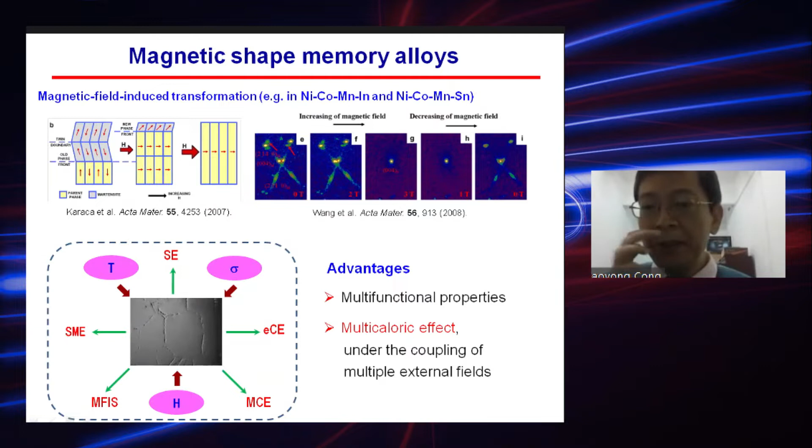However, these kind of alloys are very brittle, and the critical field for magnetic field-induced transition is too high, which are two bottlenecks for applications. Another disadvantage of this kind of alloy is that its elastocaloric effect is small, especially when we compare it with nickel titanium.

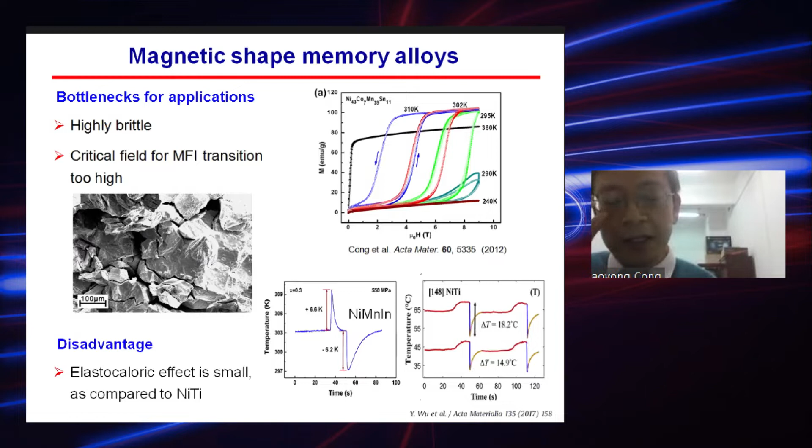Our recent work mainly focuses on 2 points. The first one is overcoming the brittleness issue, for which we use a strategy of forming oligocrystalline structure through microwire preparation. And the second part is high performance design, and we have got elastocaloric effect with adiabatic temperature change as high as 31.5 Kelvin. The first part is more related to metallurgy, and the second part is more related to physics. So now the first part, overcoming the brittleness issue.

We know that nickel manganese-based magnetic shape memory alloys show multifunctional properties, including magnetocaloric effect, elastocaloric effect, and barocaloric effect. And it can realize multi-caloric cooling under the coupling of multiple external fields. But the polycrystals are very brittle, the grain boundaries are very weak, and they are prone to intergranular fracture during loading. Therefore, the cyclic stability of the elastocaloric effect is very poor, which hinders its practical applications.

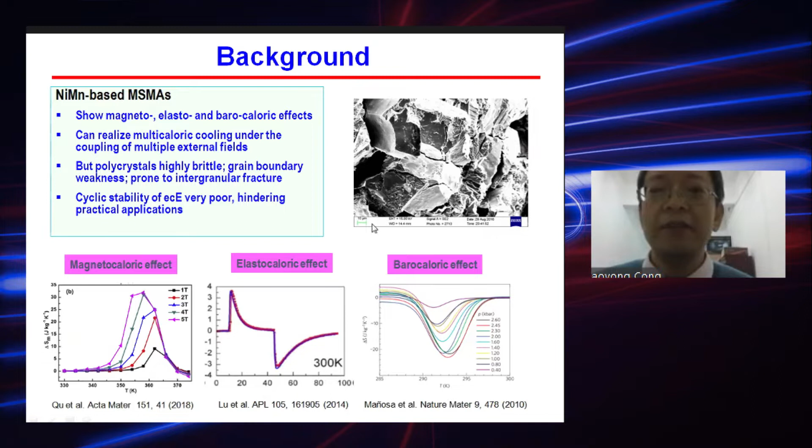Our strategy is to create this kind of oligocrystalline structure through microwire preparation. With this kind of structure, we can increase the surface area and form a bamboo-like structure. We know that in polycrystals of magnetic shape memory alloys, during the phase transformation, there is strain incompatibility at triple junctions or along the grain boundaries. So it is very easy to form stress concentrations at the triple junctions and the grain boundaries, and thus during loading, cracks can easily occur along the grain boundaries or at triple junctions, leading to a brittle intergranular fracture.

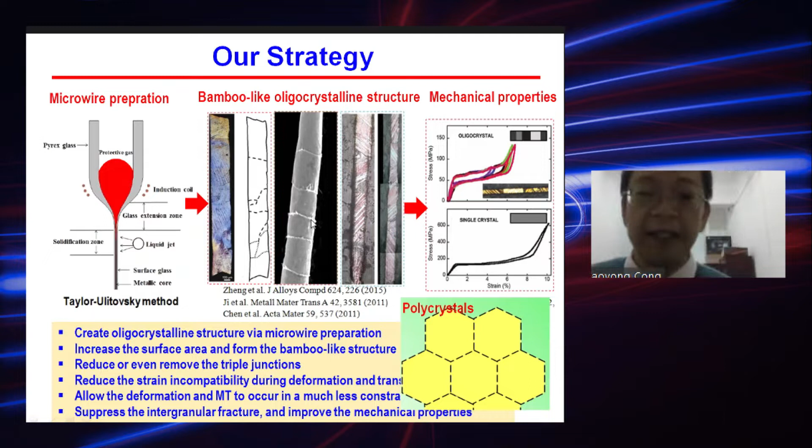But with this kind of oligocrystalline structure, because the surface area is large, there are only a few grains in the sample, and it has bamboo-like grains. Therefore, we can reduce the strain incompatibility at grain boundaries during both deformation and stress-induced phase transformation. This allows the transformation and deformation to occur in a much less constrained environment. And therefore, the intergranular fracture can be suppressed, and the mechanical properties can be improved.

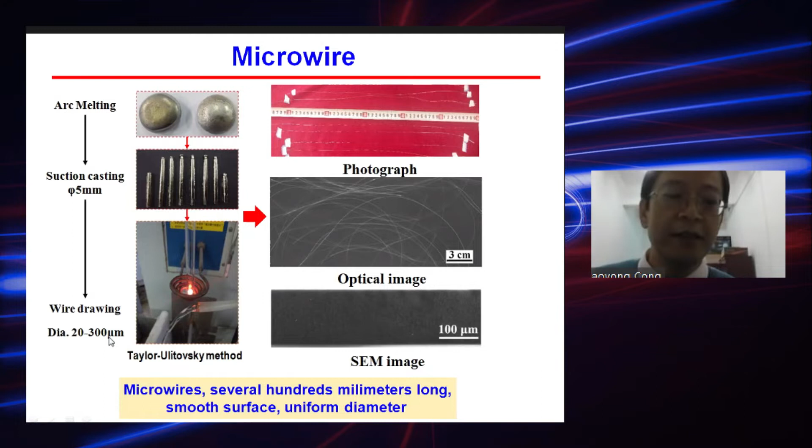So we first use arc melting to prepare the button ingots, and then we use suction casting to get the cylindrical rod. And then we use the Taylor-Ulitovsky method to draw wires, and the wires can have a diameter between 20 and 300 micrometers. And the microwires can be several hundreds of millimeters long, and they have a smooth surface and a uniform diameter.

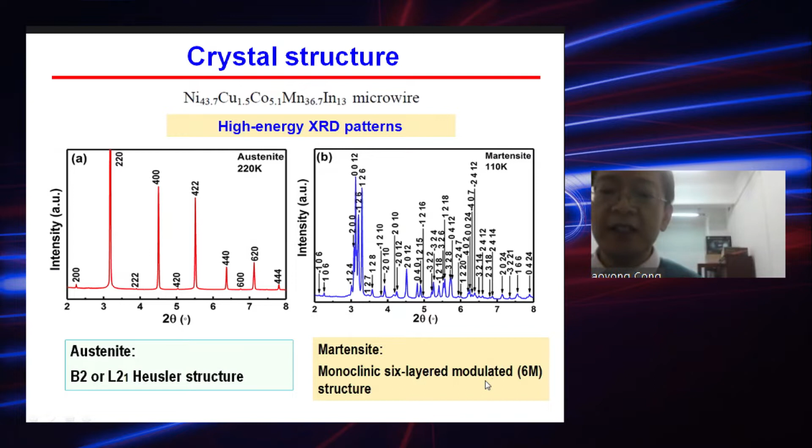First, we studied the crystal structure at both high temperature and low temperature by X-ray diffraction experiment. We find that the austenite has a B2 or L21 structure, and the martensite has a monoclinic 6-layered modulated structure. Then we investigated the mechanical properties and superelasticity. We know that the bulk polycrystals of magnetic shape memory alloys show hardly any tensile deformability. Even for compression, the superelastic strain is usually small, about 1%.

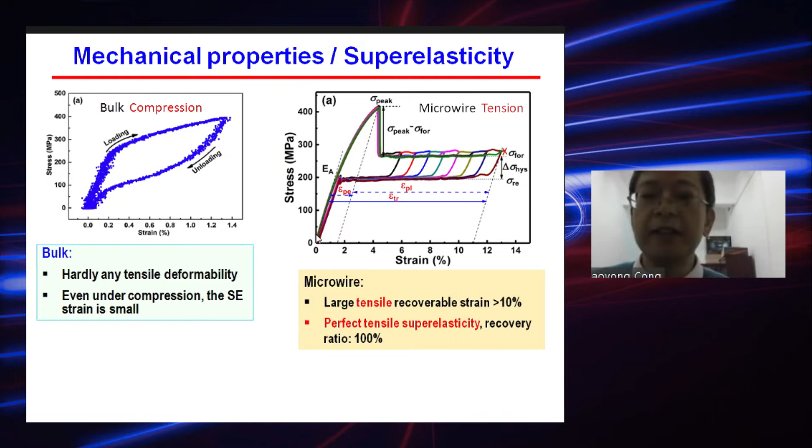But for the microwire, we get very large tensile superelasticity. The recovered strain can be more than 10%. And also, the strain can be fully recovered after unloading, giving rise to a perfect tensile superelasticity.

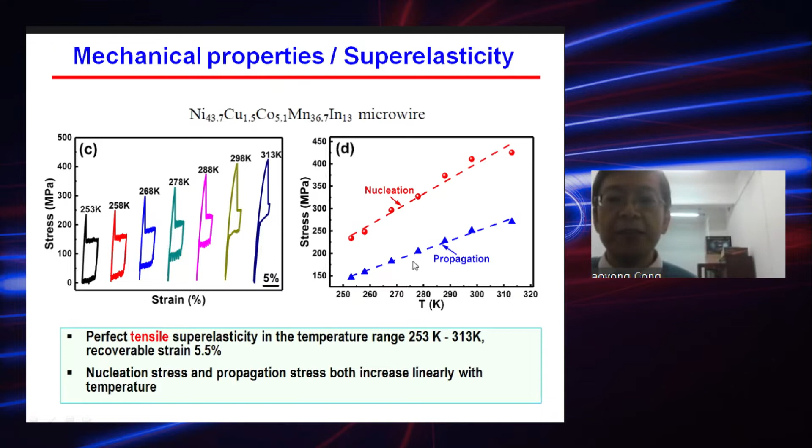And we checked the superelasticity at different temperatures. We find that we can get perfect tensile superelasticity at temperatures from 253 to 313 Kelvin, with a large recovered strain of more than 5%. And also the nucleation stress and the propagation stress increase with the temperature.

Then we want to check whether there's magnetic field-induced transformation in the microwire. We first performed thermomagnetization curves. We find that applying a magnetic field significantly decreases the phase transition temperature. Therefore, it is possible to induce transformation with the magnetic field at constant temperatures around the phase transition. Then we check the magnetization as a function of field. We find that at different temperatures between 166 and 180, we have a strong magnetic field-induced first-order phase transition.

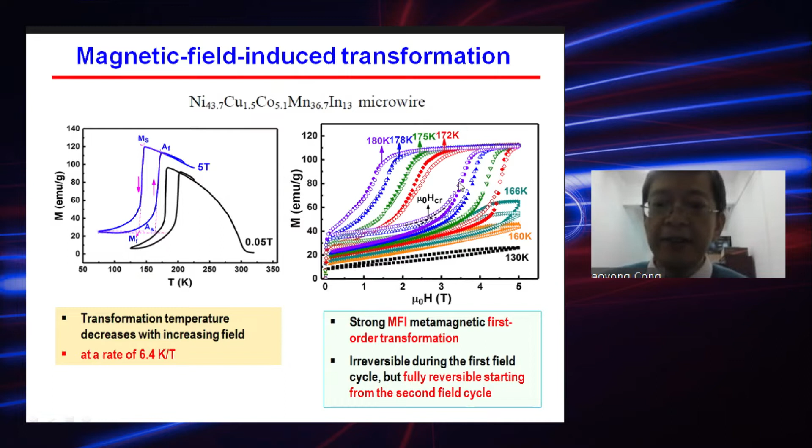Although this transition is somewhat irreversible during the first cycle, starting from the second cycle, it becomes fully reversible. This reversible magnetic field-induced phase transition can give rise to a variety of magneto-responsive properties. For example, magnetocaloric effect, magnetic superelasticity, magnetoresistance, and magnetothermal conductivity.

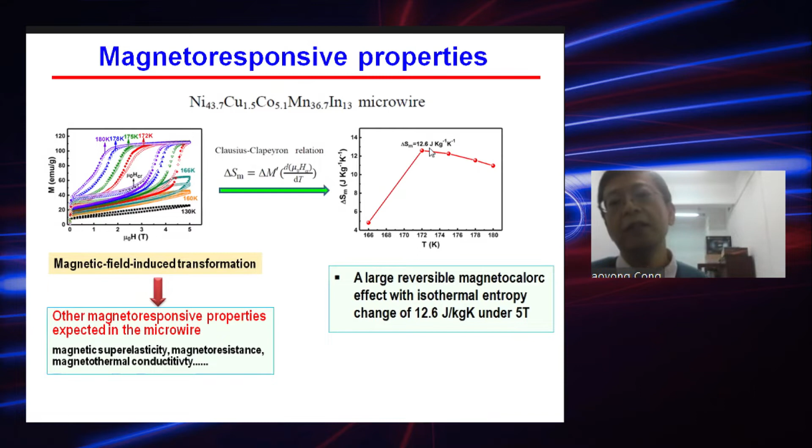We estimated the magnetic entropy change with this equation. We find that under a field of 5 Tesla, we can get a large reversible magnetic field-induced isothermal entropy change of 12.6 J per kilogram per Kelvin.

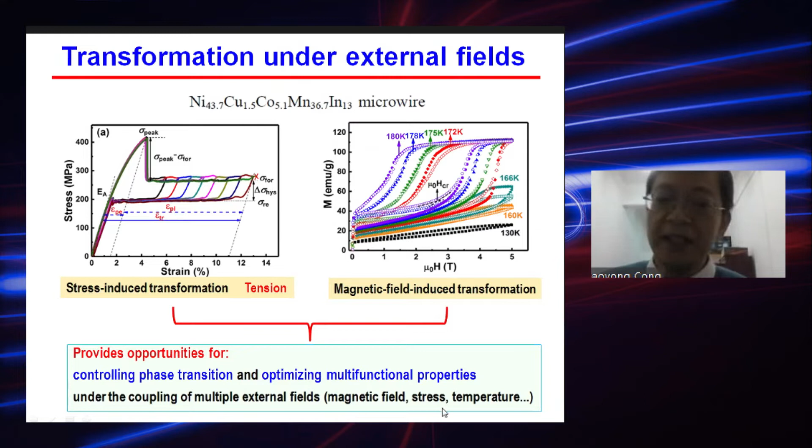Just as we mentioned, we get both stress-induced transformation and magnetic field-induced transformation in the microwire. This provides opportunities for controlling the phase transition and optimizing the multifunctional properties under the coupling of multiple external fields, that is, magnetic field, stress, and temperature.

With this part, I give a summary. We have developed an oligocrystalline microwire with both tensile superelasticity and magnetic field-induced first-order phase transition. This microwire shows perfect tensile superelasticity with a recovered strain more than 10%. This is in sharp contrast with the bulk sample that shows hardly any tensile deformability.

A magnetic field-induced transition from martensite to austenite has been realized in the microwire, which may give rise to a variety of multifunctional properties. With stress-induced transformation and magnetic field-induced transformation in this microwire, we can try to get the multicaloric effect under both stress and magnetic field.

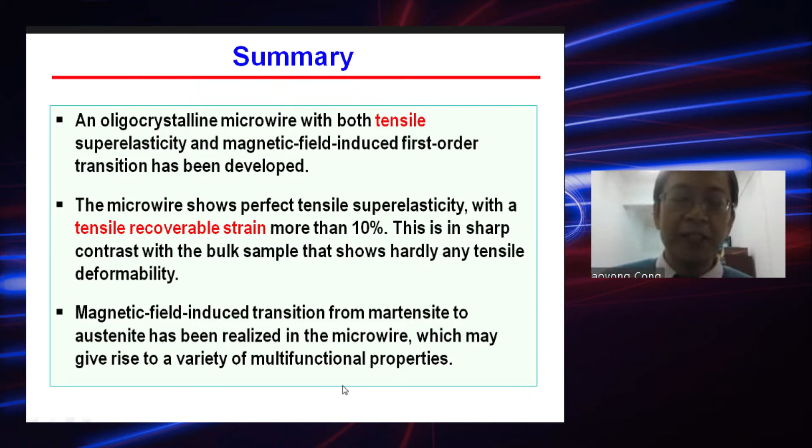The second part is high-performance design for the big elastocaloric effect. This part of the work is done in collaboration with Professor Luis Mañosa and Professor Antoni Planes. Our material design concept for getting a large elastocaloric effect mainly consists of the following 2 points. First, the material should have a large transition entropy change. This will ensure that we have a potential to obtain a large elastocaloric effect.

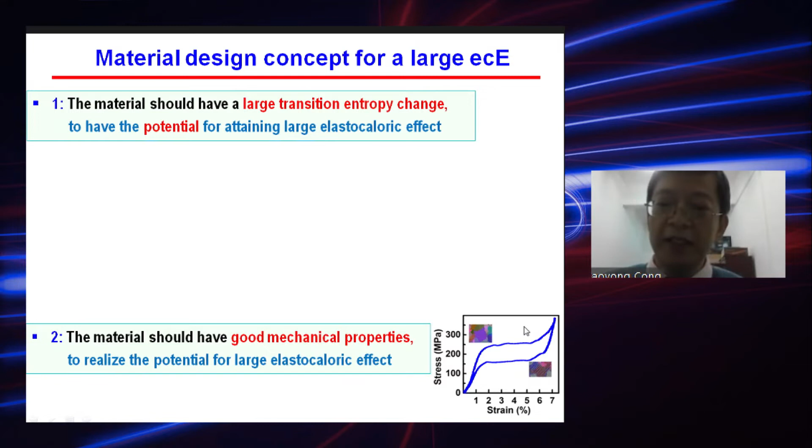Second, the material must have good mechanical properties, so that when we have the stress-induced martensitic transformation, the sample will not break and will not deform plastically, so that the stress-induced transformation can be complete and we can make full use of the large transition entropy change.

Note that for shape memory alloys, transformation entropy change mainly consists of 3 parts: lattice entropy change, magnetic entropy change, and electronic entropy change. Among these, the lattice entropy change plays a dominant role. Especially for martensitic transformation, the larger the unit cell volume change across the phase transition, the stronger the first...

Our material design concept mainly consists of 2 points. First, the material should have a large transition entropy change. This will ensure potential for obtaining a large elastocaloric effect. The second point is the material should have good mechanical properties, so that during the stress-induced transition, the sample will not break and will not deform permanently. This will ensure a complete stress-induced martensitic transformation, which will make full use of the potential to obtain a large elastocaloric effect.

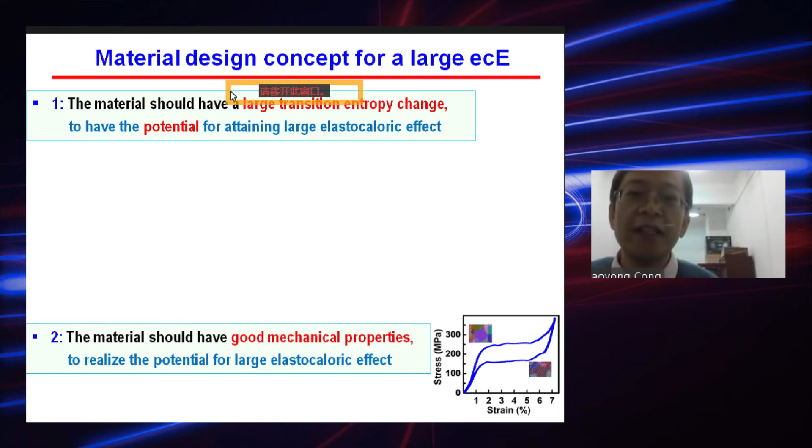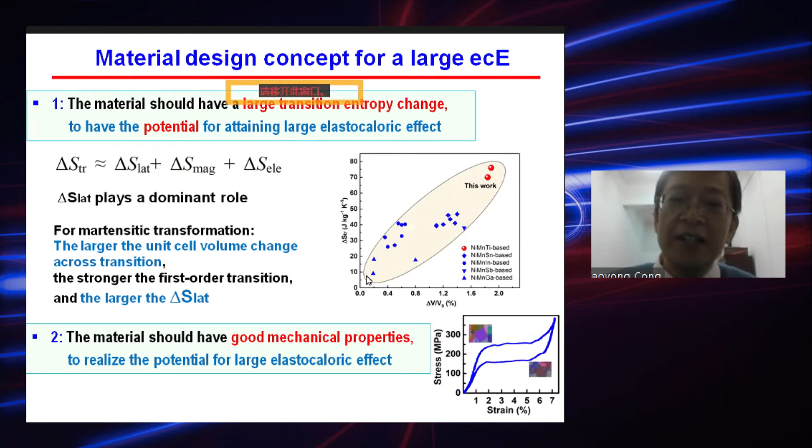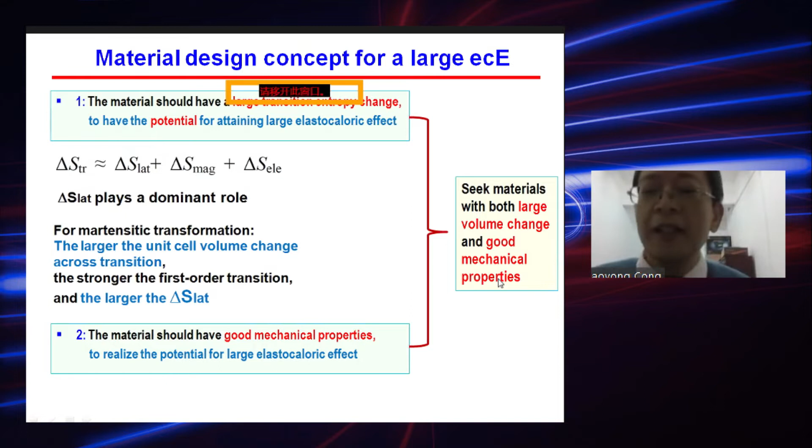As we know, for shape memory alloys, the transformation entropy change consists of 3 parts: lattice entropy change, magnetic entropy change, and electronic entropy change, among which the lattice entropy change plays a dominant role. Especially for martensitic transformation, the larger the unit cell volume change across transition, the stronger the first-order transition, and the larger the lattice entropy change. Therefore, the problem becomes seeking materials with both large volume change and good mechanical properties in order to get a large elastocaloric effect.

Considering that the nickel-manganese alloy has a large unit cell volume change, we mainly focus on the nickel-manganese-based Heusler alloy families, which include nickel-manganese-gallium, nickel-manganese-indium, nickel-manganese-tin, and nickel-manganese-titanium. We first use first-principles calculation to get the elastic constants and moduli.

We focus on the parameters reflecting the intrinsic brittle or ductile properties of metals. They are B over G and C12 minus C44, which is also called Cauchy pressure. We find that among these nickel-manganese-based alloy systems, nickel-manganese-titanium has both the largest B over G and the largest Cauchy pressure. Therefore, it is most probable to have the best mechanical properties in the nickel-manganese-titanium family.

Thus, we prepared a series of nickel-manganese-titanium alloys with titanium substituting manganese. We find that with the increasing amount of titanium, the phase transition temperature decreases. Because we want to get the elastocaloric effect at room temperature, we mainly focus on the alloys with transition temperature slightly below room temperature. As I just mentioned, the nickel-manganese-titanium alloy system has the best intrinsic mechanical properties.

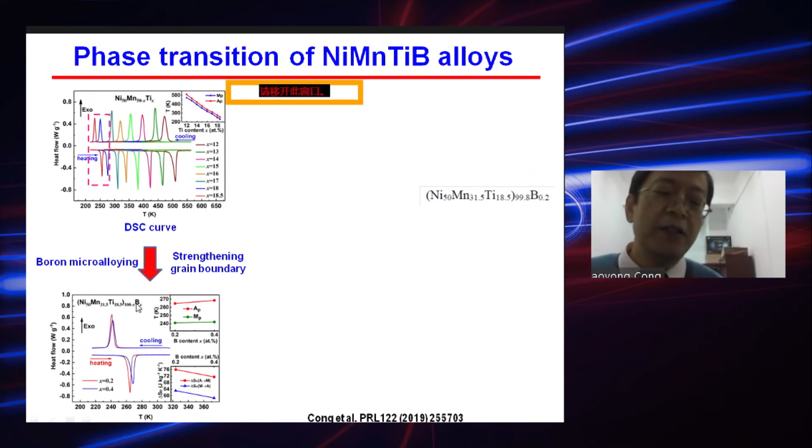But for polycrystals, we know that for this kind of polycrystals, especially for the alloys with large volume change across phase transition, the grain boundaries are very weak. Therefore, we use boron microalloying to strengthen the grain boundaries in this alloy system, so that we can expect good mechanical properties in the polycrystals.

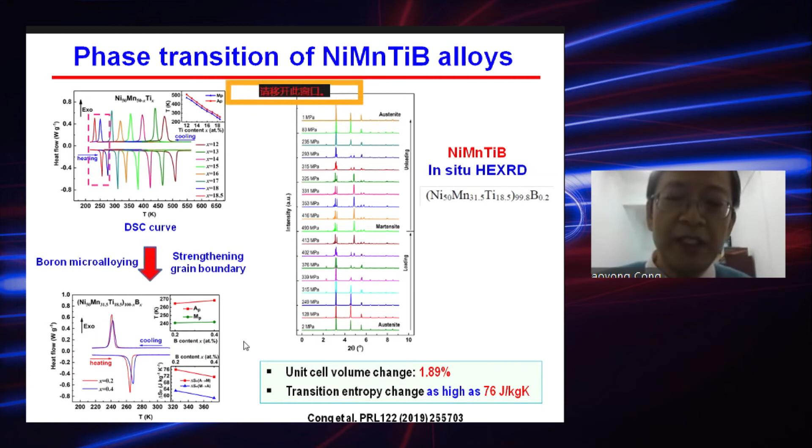We used in situ synchrotron high-energy X-ray diffraction experiments to get the unit cell volume change, which is as large as 1.9%. And we find the transition entropy change is as high as 76. Therefore, we expect that we can get a large elastocaloric effect in this sample.

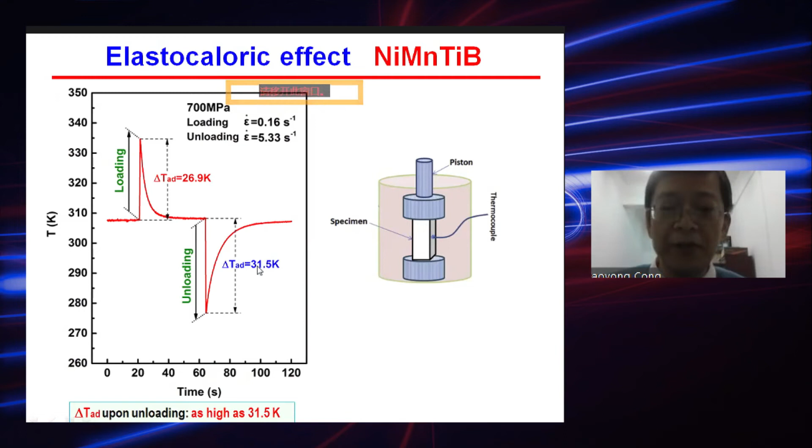When we tested the elastocaloric effect, surprisingly, we find that during unloading, we can get an adiabatic temperature change as high as 31.5 Kelvin. We also estimated the stress-induced isothermal entropy change by integrating the areas on the stress-strain curves measured at different temperatures. We find that the stress-induced isothermal entropy change is up to 45 joules per kilogram per Kelvin.

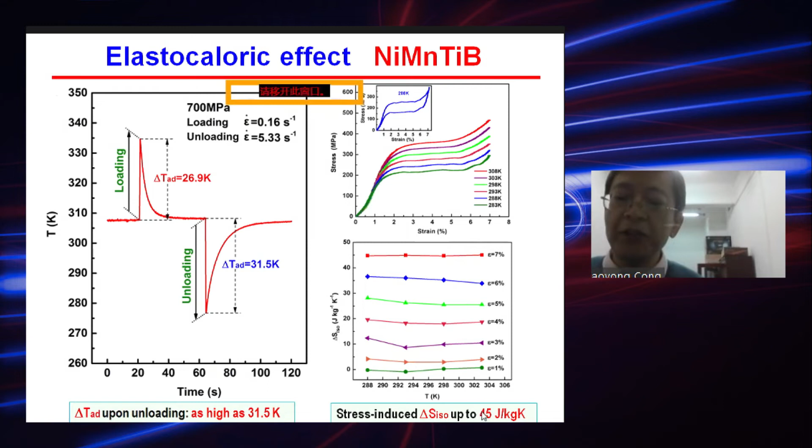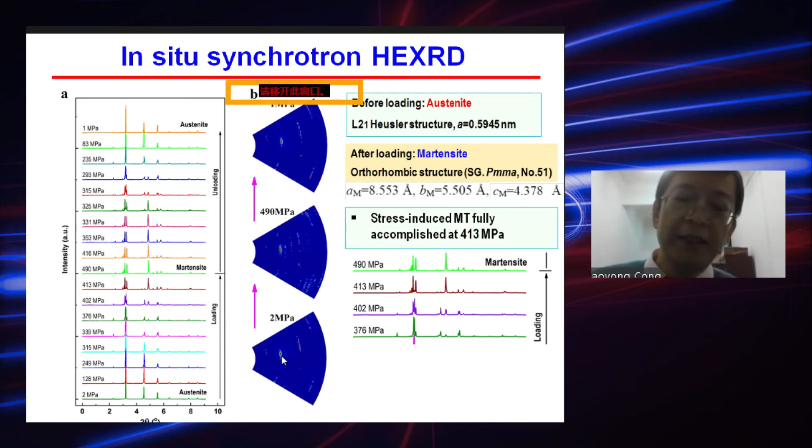We carefully analyze the X-ray diffraction pattern. We find that at 413 megapascal, the stress-induced martensite is complete with no residual austenite. We checked the two-dimensional diffraction patterns before loading, at the maximum stress and after unloading. We find that the diffraction patterns before loading and after unloading are almost identical. This shows that the stress-induced martensitic transformation is fully reversible.

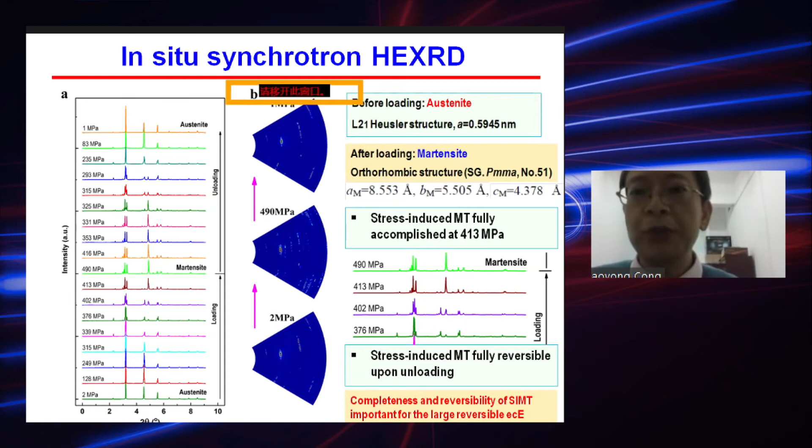The completeness and reversibility of the stress-induced martensitic transformation is very important for the large reversible elastocaloric effect. If the transformation is not complete, we cannot make full use of the latent heat. If the transformation is not reversible, the elastocaloric effect can only be used once, not for repeated times. With the lattice parameters of austenite and martensite, we get a large unit cell volume change of 1.9%. This leads to a large lattice entropy change and thus a large transition entropy change. And finally, we get a large elastocaloric effect.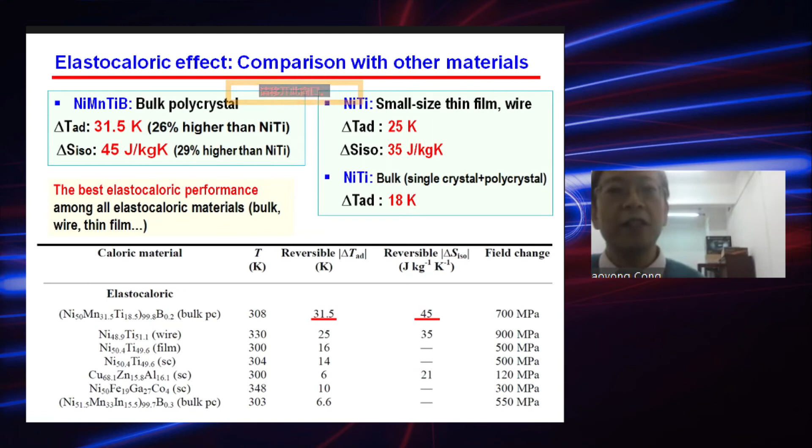We also compared with other materials, and we find that our sample shows the best elastocaloric performance among all elastocaloric materials, no matter whether it is in bulk, wire, thin film forms or in other forms. We also compared the temperature change with other caloric materials, including magnetocaloric, electrocaloric, and barocaloric materials. It should be mentioned that here we only compare the adiabatic temperature change that is directly experimentally measured. We did not consider the values obtained indirectly or quasi-directly. And this is the position of our adiabatic temperature change, and we find that it is the highest adiabatic temperature change among all caloric materials.

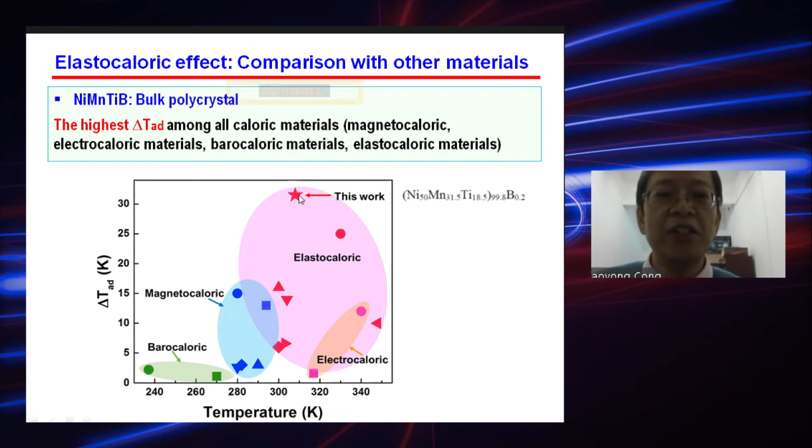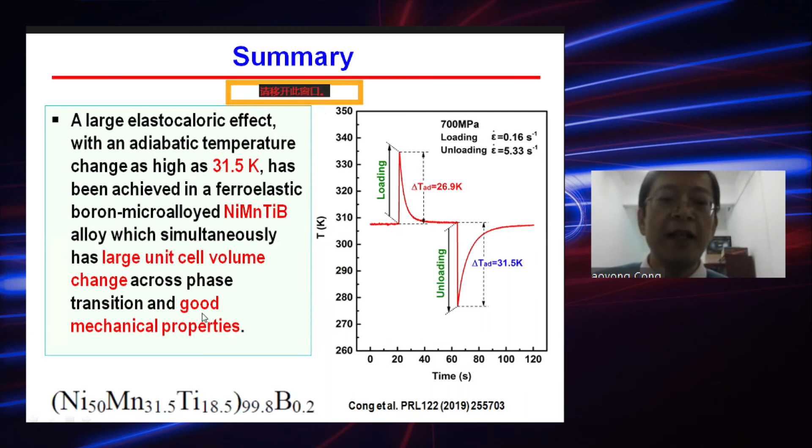This is a summary of this part. We obtained a large elastocaloric effect with an adiabatic temperature change as high as 31.5 Kelvin in nickel manganese titanium alloy, which simultaneously has a large unit cell volume change across phase transition and good mechanical properties.

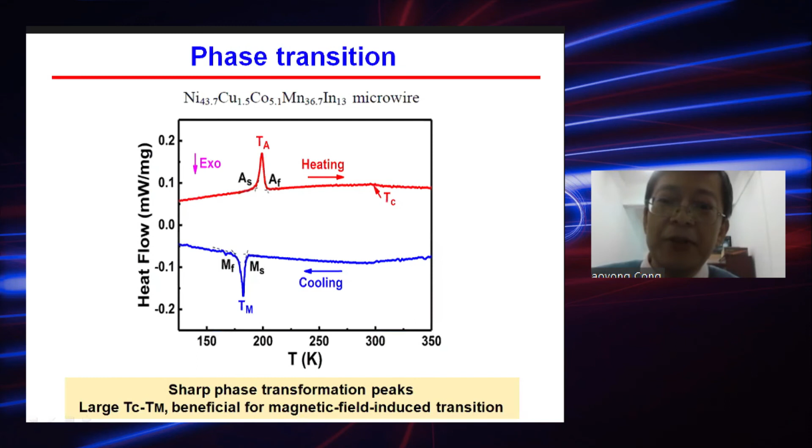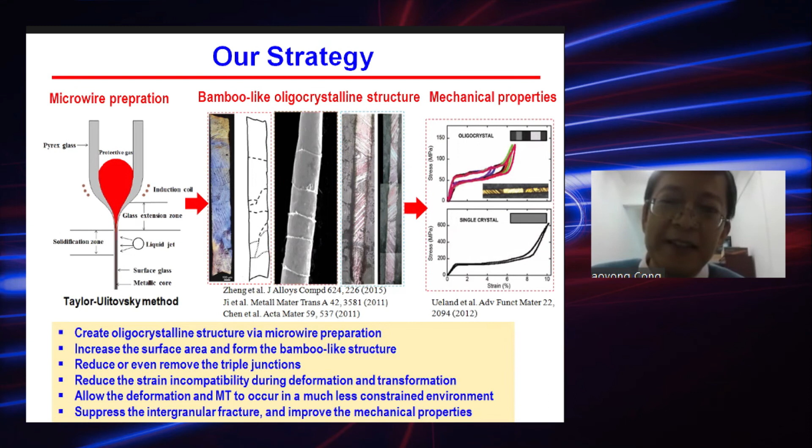I have just one question about your microwires: there is a large difference between what you call the nucleation stress and the propagation stress. Yes. A huge tooth. Do you have an explanation for such a large difference? I think in this kind of microwire, when you want to nucleate martensite, its energy barrier is very large. You need large stress to nucleate martensite. Once it's nucleated, you don't need such a large stress, and it can propagate very easily. This may be because in the microwire we don't have many grain boundaries, and the microstructure is homogeneous. So there are quite few defects which can facilitate the nucleation.

Okay. And do you think it could be a good strategy to put some kind of defects in order to reduce the nucleation barrier, but still keep the good mechanical properties? That would make even easier actuation for these microwires. I'm just guessing if it would be possible to put some nucleation sites somehow. I don't know if this is possible.

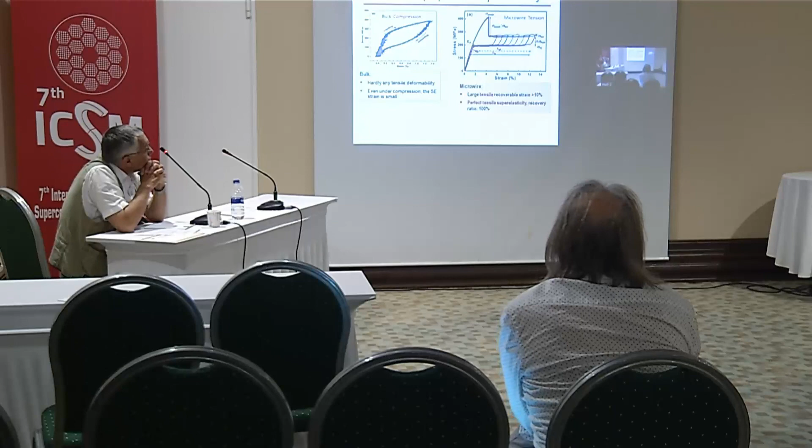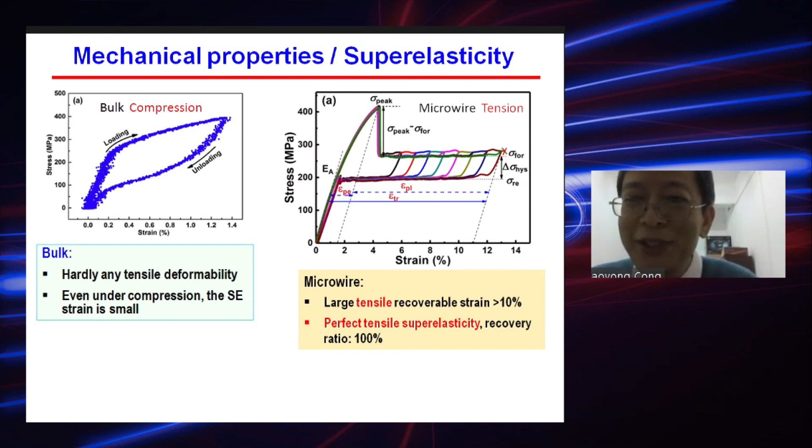Yes, maybe it's possible, because in the nickel titanium wires, in the nickel-rich sample, you can introduce very fine precipitates, Ni4Ti3. Maybe in this kind of material, we can try also to introduce some precipitates. Then we can reduce the barrier for nucleation of martensite without sacrificing the mechanical properties. I hope so. Thank you.

Thank you. Any other questions? I have a small question. In the second part, you get this data in the compression test, correct? Yes. So do you have the option to prepare wires of this nickel manganese titanium boron and make tensile tests? Is it possible?

Yes. We tried. We devoted a lot of effort to do that. Unfortunately, because it contains titanium, which is a very active element, it reacts with glass. Because we use the glass coating method, it reacts with the glass, and finally we didn't succeed to acquire this sample. So it is not easy to prepare samples for tensile measurements. Still, because of the titanium, it is not very ductile like nickel titanium. But for compression, we can succeed 5,000 cycles, or even 10,000 cycles. Thank you.